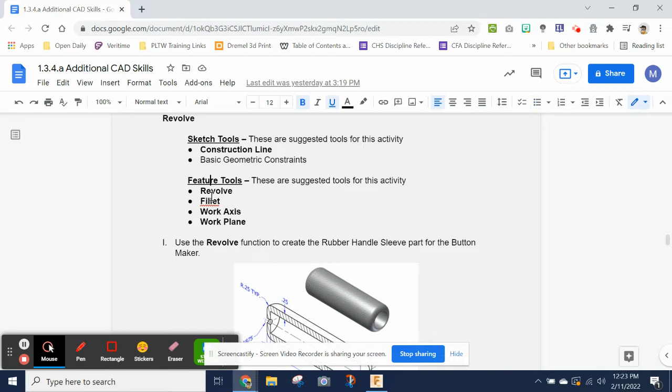Ultimately, we're going to use the revolve function to create a rubber handle sleeve. Remember, the revolve is basically extruding in a revolution or circle rather than straight line extrusions.

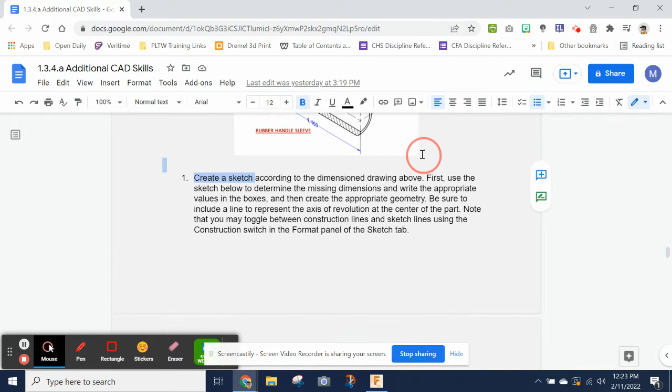So we're going to create a sketch. I know I said according to the dimension drawing above, but we're really going to use the one below. That was my mistake. We're going to create this sketch.

A couple of things: include a line to represent the axis of revolution. There's a toggle for construction lines and construction switch when we start a sketch, and I'll show you all where that is in Fusion.

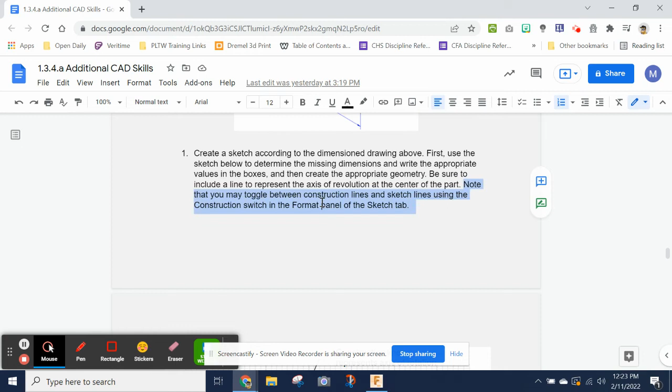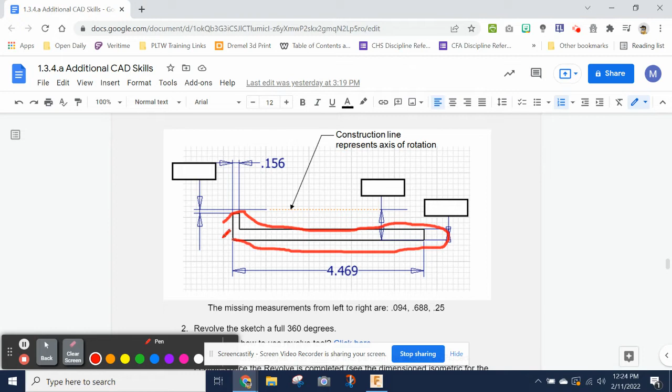Ultimately what we're going to do is this. This is the first sketch. I've already given you the missing measurements, right? What I'm going to do at first is draw this object at roughly that correct size, but it doesn't matter.

So let's go to Fusion and get started. First we need a new file. I'm going to create a sketch in the XY, in the front face plane.

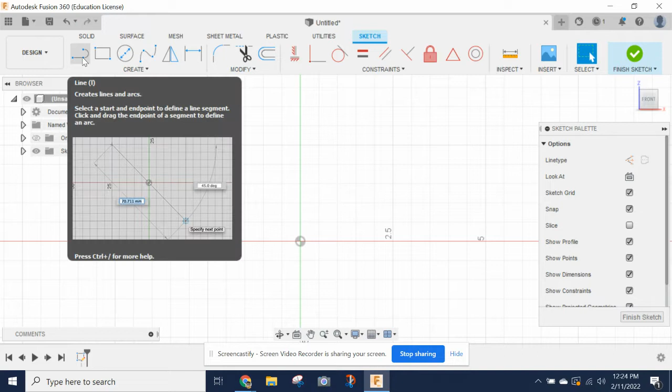I'm going to use the line tool, and I'm just going to roughly lay out the shape like I know that it is. I know it's almost 4 something inches long, so notice that I'm not getting exact measurements, but I do see when it's highlighted that I'm roughly 4 point something inches. So there we go.

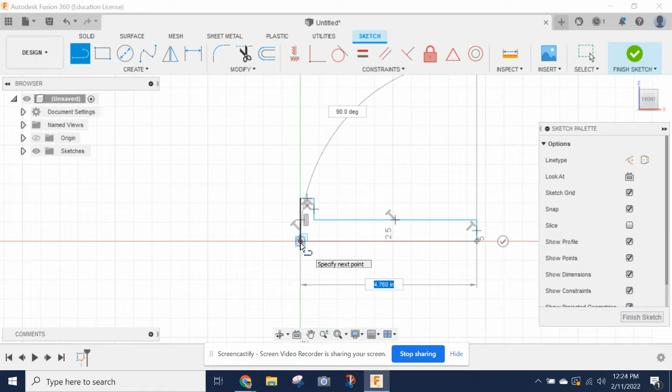I'm going to hit escape, and that's going to back me out to kind of my home tool, which is just the mouse pointer. I'm also going to look over here at the sketch palette and this line type. If you don't see this, the open and close button right here will do it for you.

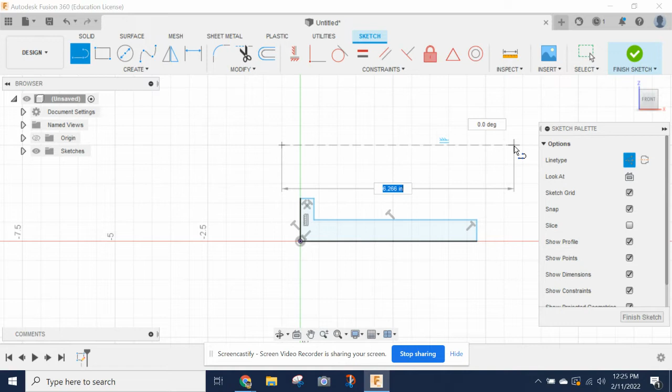I'm going to turn on the construction line and start another line. For now, I'm just going to draw it up here. Hit escape. Notice that I've done it way above, and that's just going to help me in a little bit.

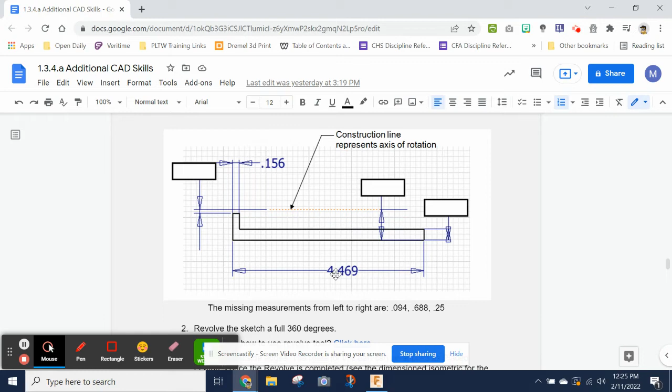Now that we've done that, we need to put some measurements on this thing. So let's go back to our instructions. We see 0.156 and 4.469 here, so I'm going to go ahead and do those two.

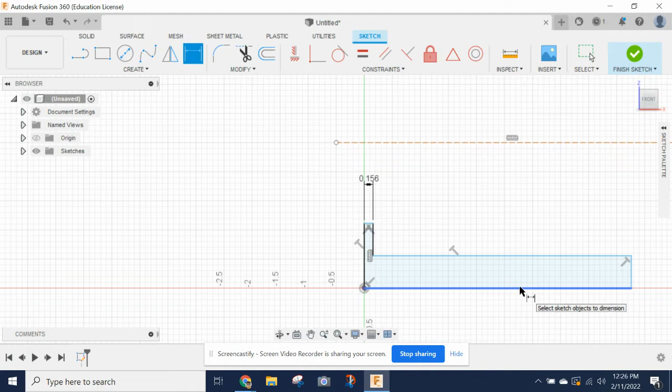Sketch dimension. I want this blue line to be 0.156. And I want this very bottom one — if I do click just once, it's going to do the entire line — to be 4.469.

Now that doesn't finish it. We've got these missing ones. Used to be I would make y'all figure them out, but we have enough to do that I'm just giving them to you. So from left to right, this is 0.094, 0.688, 0.25.

0.094. This is the 0.688. And this one's the 0.25.

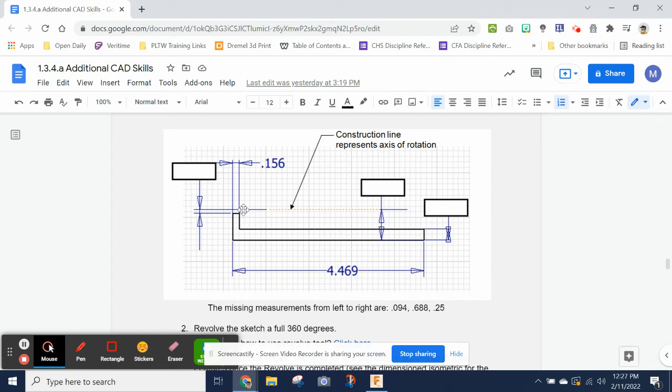A couple things to note as well is that this 0.094 is the distance between the top line of this little jut out and the construction line. You can see that because that's where our extension lines are.

So how we're going to do that is we're going to have our dimension tool still selected. We'll zoom in, and we're going to select our blue line again. Now we're going to click the blue line, then click the construction line. That distance is 0.094.

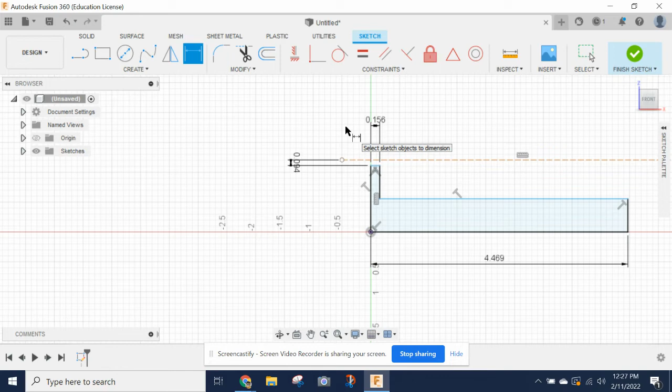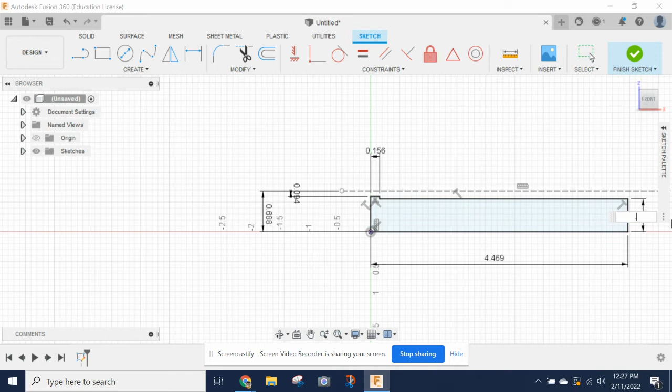I know from here to here, this is the 0.688. And our final dimension — it looks a little weird, but we've got to do this side, remember. This side dimension, clicked on that line and pulled it out, is 0.25. So there we go. I'm going to hit escape, and that is the base sketch.

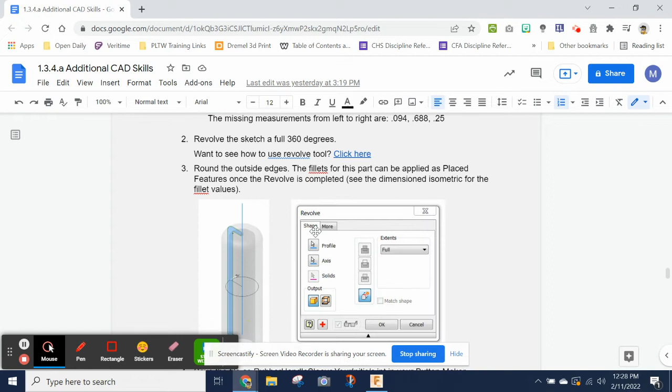So we're going to finish our sketch. Next, the instructions tell us to revolve the sketch a full 360 degrees. So if you want to watch how we do that, we're going to use the Revolve tool.

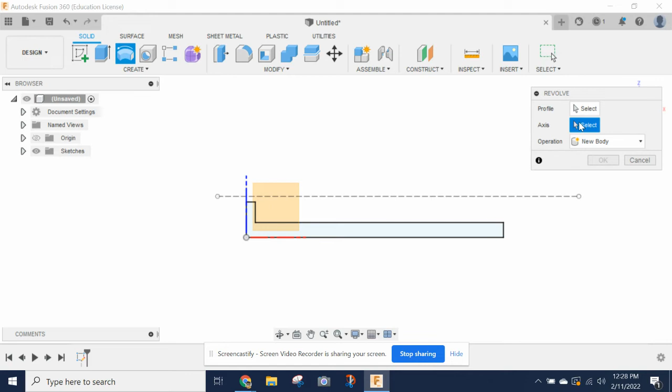Profile — it's already selected our profile, but if you have more than one thing that can be revolved, usually this is the first thing you're going to have to click: select profile. The axis is what do we want it to revolve around, and that is what our construction line is for. So we click that. We've selected our profile.

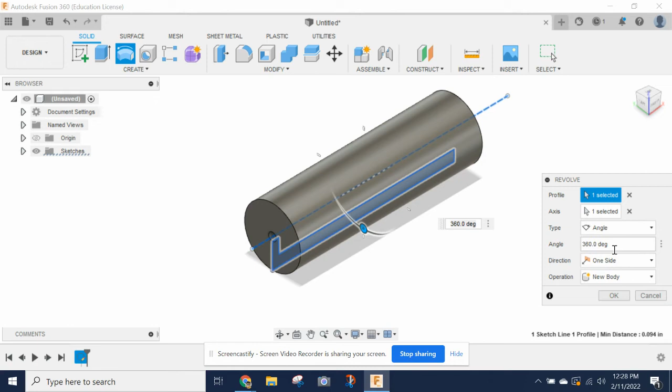And now if you look, we have our handle. There's other options that you can change here as you want to, but we're not worried about those for now. So it should look like this. It's a rubber handle.

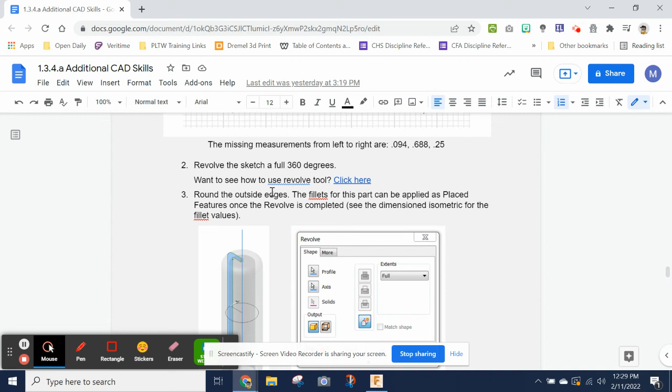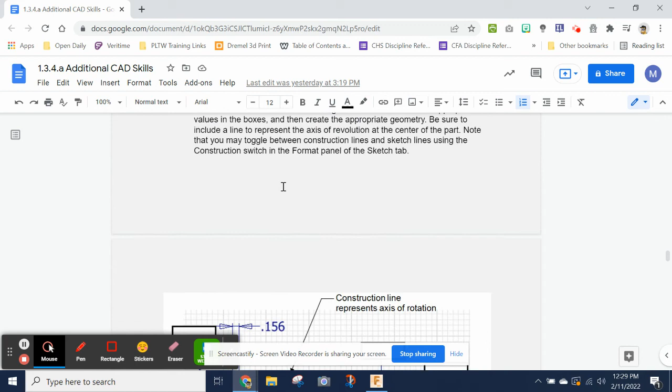Let's look at our final instruction. The fillets for this part are going to be applied as placed features once the revolve is completed. So we're going to round the outside edges by using a 3D feature fillet. It says the dimensioned isometric for the value, so let's go up here.

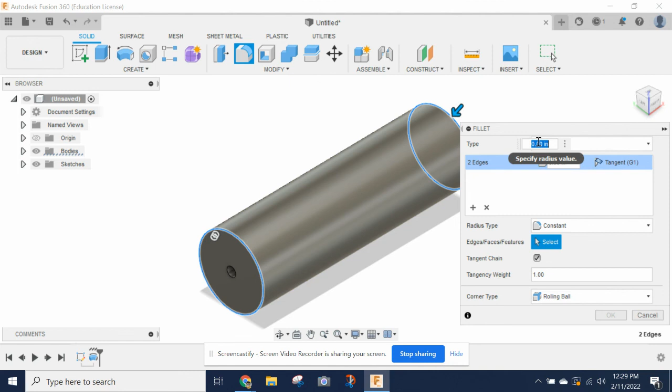If you see our radius of 0.25, that is the fillet that we're applying. So we're going to come here for a fillet. We're going to select this edge and this edge — we want both of them. The radius value, as we can see in here, is 0.25. Radius type constant. We got two edges, a 0.25 fillet.

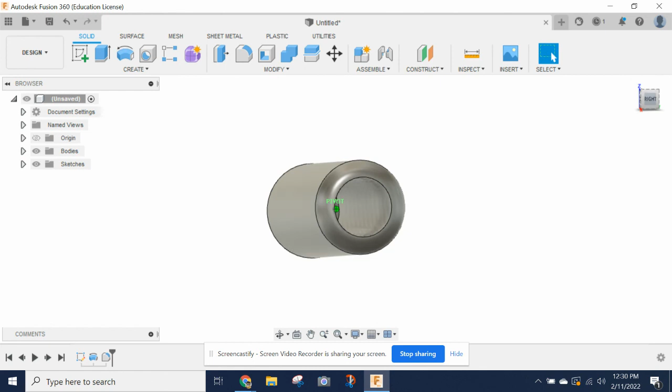We've selected them. We're not worried about the rest of this. We're going to hit OK. And there is the rubber handle. If you screenshot this, you can turn it in to the assignment.